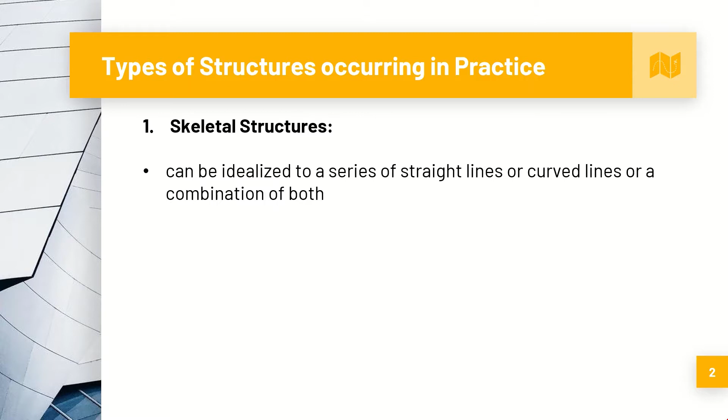The first kind of structure occurring in practice are skeletal structures. These structures can be idealized to a series of straight lines or curved lines, or a combination of straight lines and curved lines. These structures look like a skeleton, meaning each structural member will look like the bones of a skeleton. For example, building frames, arch bridges, roof trusses, etc.

Let me explain this further with real pictures. As you can see, this is a building frame, and if I consider the front face, I can idealize the beams as horizontal straight lines, and I can idealize the columns as vertical straight lines. So for the analysis of the front face of this building, I can draw this structure like this - a series of horizontal as well as vertical straight lines. Each member looks like the bones of a skeleton, so this is a skeletal structure.

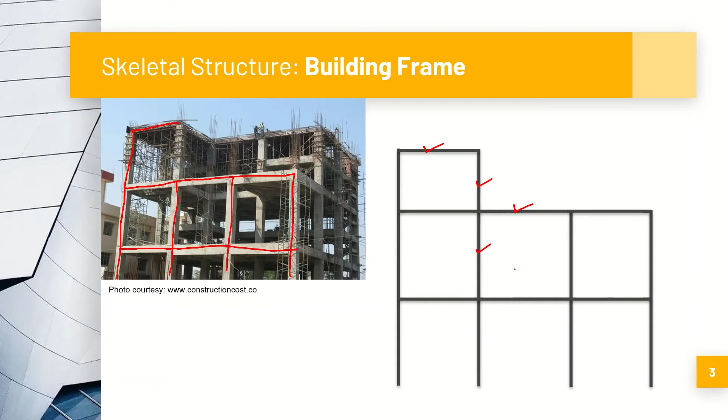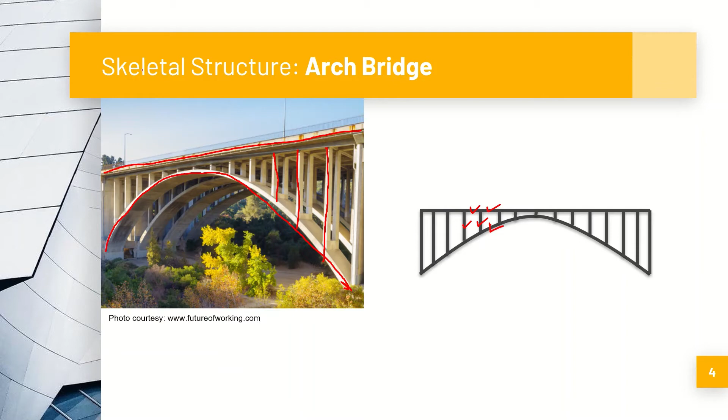Similarly, if you consider this arch bridge, this arch can be idealized to a curved line. The deck above can be idealized to a straight line, and each of these connecting units can be considered as vertical straight lines. I'm not going to draw all of this, just see here - this is a curved line and a series of vertical as well as horizontal straight lines. So this is also a skeletal structure.

The next type of structure occurring in practice are surface structures. These are structures that can be idealized to a plane or a curved surface. For example, flat slab, domes, etc.

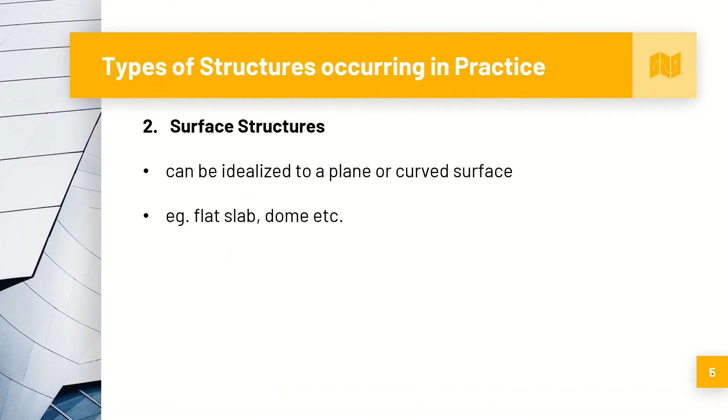I will take real pictures of the examples and explain further. If you see here the flat slab, can you idealize it to a straight line? No, you cannot. You have to idealize it to a plane. As you can see here, it is idealized to a plane, and then you can do your analysis. You can never idealize it to a straight line.

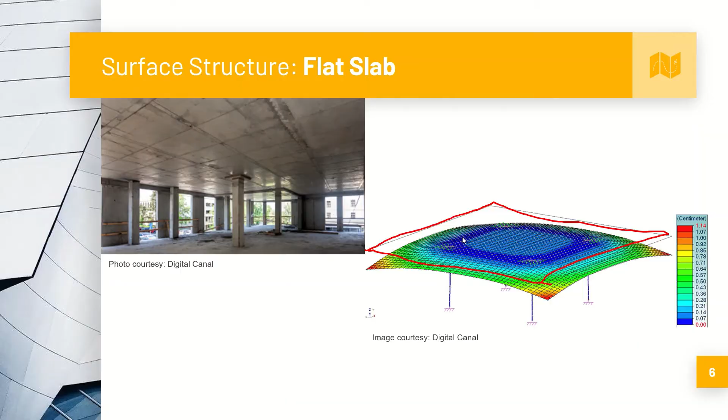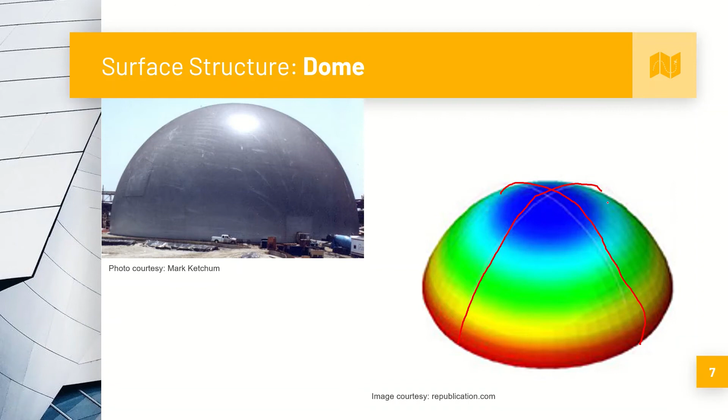Similarly, if you consider a dome, again you cannot idealize it to a straight line or curved line. You have to consider it as a surface. As you can see, this is one surface from here, and this is another surface from here. So you have to consider this as an entire surface, not one curved line - this is an entire surface. So this is a surface structure.

The third kind of structure occurring in practice are solid structures. In a solid structure, you can neither idealize it as a straight line, a curved line, a flat plane, or a curved plane. Such kind of structures are called solid structures. For example, dams, retaining walls, etc.

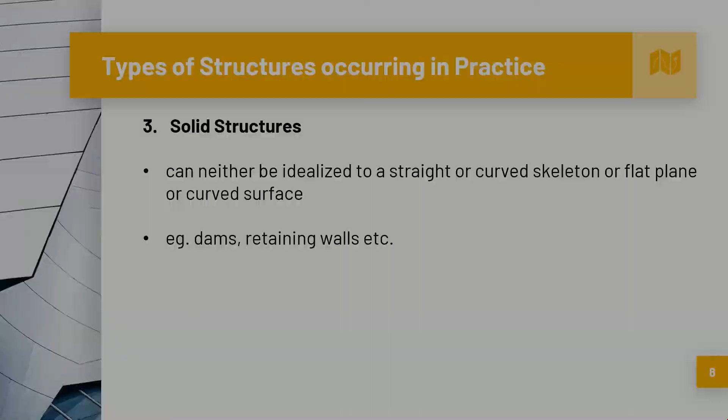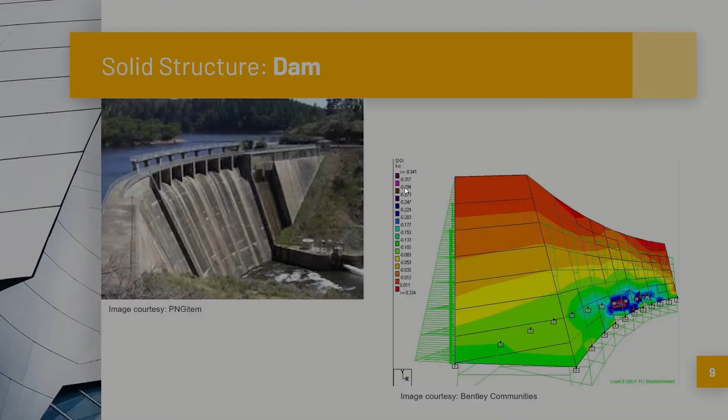So just to summarize this video, the types of structures occurring in practice are firstly skeletal structures, which can be idealized to either straight lines or curved lines or a combination of both. Each structural member of the skeletal structures looks like a skeleton. For example, building frames, arch bridges, roof trusses, etc.

The second type is surface structures, that is, they can be idealized to a plane or curved surface. For example, flat slab, domes, etc. And the third type is solid structures. It can neither be idealized to a straight line, a curved line, a flat surface, or a curved surface. This kind of structure is called solid structures. For example, dams, retaining walls, etc.